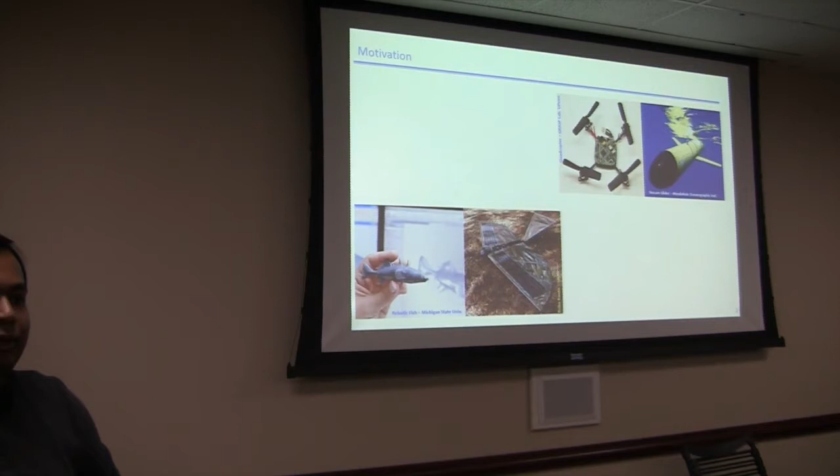So the last couple of decades have witnessed a tremendous advancement in unmanned vehicular technologies. For example, these quadcopters and underwater sea gliders are quite common in application domains, and these vehicles are being applied in many areas, for example surveillance, search and rescue missions, environmental monitoring.

In particular, these sea gliders were deployed in Monterey Bay back in 2004 for a month-long experiment to study underwater ocean corridors. And recently, bio-inspired robotics is gaining importance, and there is a group at Michigan State University who have developed this robotic fish, and currently this robotic fish is being deployed in the Great Lakes to locate and stop fish of interest in that region.

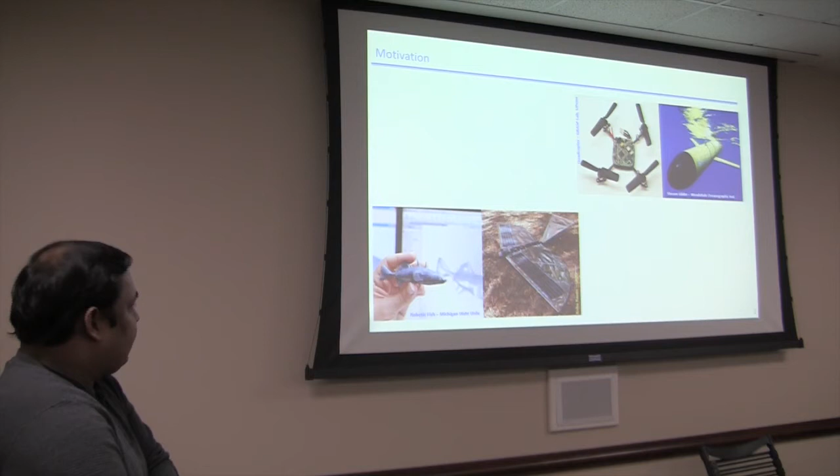And here at ISR, a group of Professor S.K. Gupta is doing research on these bird-inspired robots called Raven, and probably many of you have watched YouTube videos on this Raven, and it's quite amazing.

But the way these vehicles are deployed in the field, for example drone deployment or underwater search missions, involves a human in the loop in terms of piloting these vehicles. And that gives rise to an Achilles heel in the system in terms of the vulnerability of the communication link between the command station and the vehicle. At best, the link can be lost. At worst, the link can be taken over by an adversary.

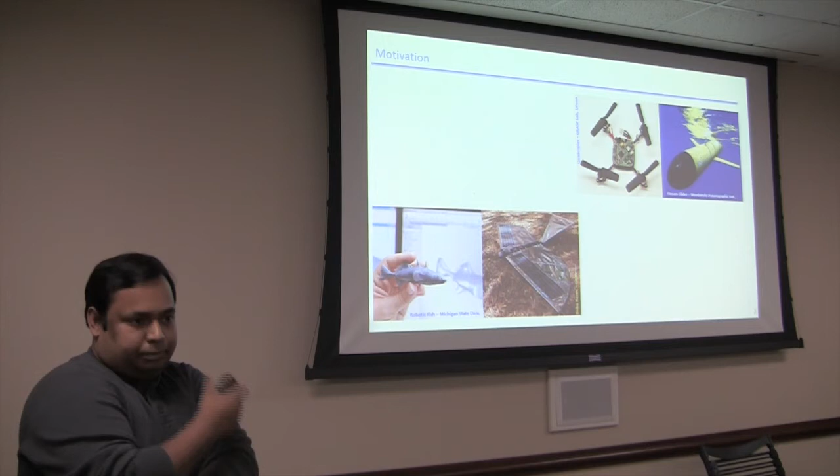So this gives rise to the need to develop complete autonomy for this group of unmanned vehicles. On the other hand, we can notice collective motion in a number of natural settings, for example ant mills or fish schools to bird flocks in the sky. There are many more examples in nature where a large number of agents interact with each other and give rise to some coordinated motion pattern.

So today I'm going to tell a story about how we can use these inspirations from nature and develop algorithms for collective motion in a group of robotic agents. And this is what I'm planning to cover today.

I begin with a brief description about the models that we'll use in the talk, and the main part of the talk will have two sub-components. In the first part, we'll describe our findings from analysis of biological pursuit and collective motion.

Here we'll use custom-made algorithms to extract parameters of motion, namely speed, curvatures, etc., from observed position data, and then we'll analyze those parameters to get an insight about the underlying flight strategies and control laws, because that's our main focus.

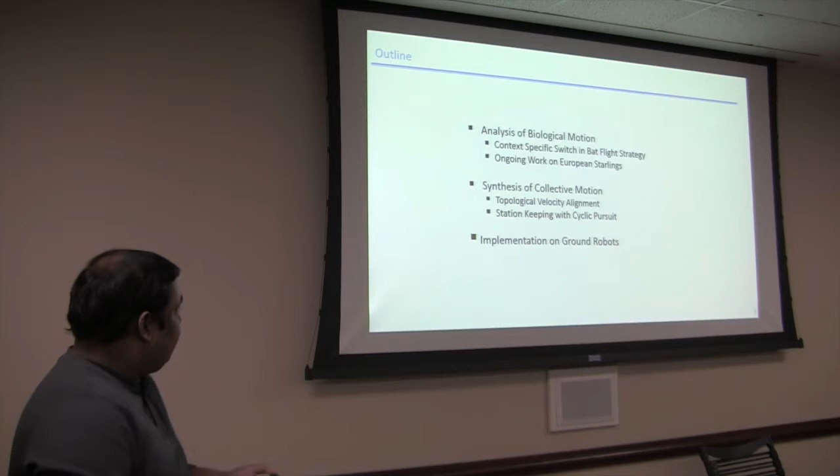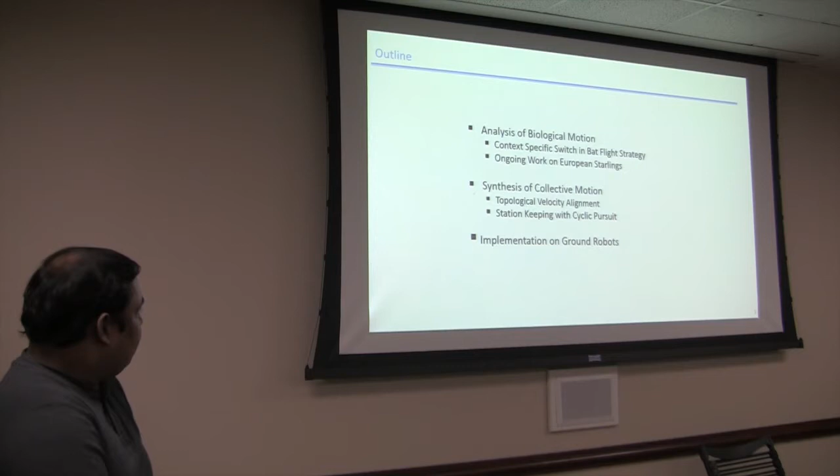Once we have an idea about the underlying flight strategies and control laws, then we can apply those principles to robotic agents. So the second part of the talk will discuss two particular strategies inspired by our findings from this analysis, and show how they can guarantee some desired behavior. And we'll conclude the talk by showing some implementation results.

Okay, so before going into the details of analysis and synthesis of collective motion, we begin by describing a model which we'll use throughout the talk to describe an agent's motion. Here we represent the position of an agent along the trajectory by this vector r. Now, if we assume that the velocity of the agent never goes to 0, then we can easily define a unit tangent vector along the trajectory.

So the first equation here describes the velocity in terms of speed nu and a normalized velocity vector x. Now, once we have a unit vector x, we can pick two more vectors y and z in such a way that x, y, z forms an orthonormal triad, or a reference frame. Now these three equations describe the evolution of that frame along the trajectory.

So these parameters u and v represent the natural curvatures for the system. These natural curvatures are very well related to classical curvature, or the inverse of turning radius. So if you take the square root of the sum of squares of u and v, you will get the classical curvature.

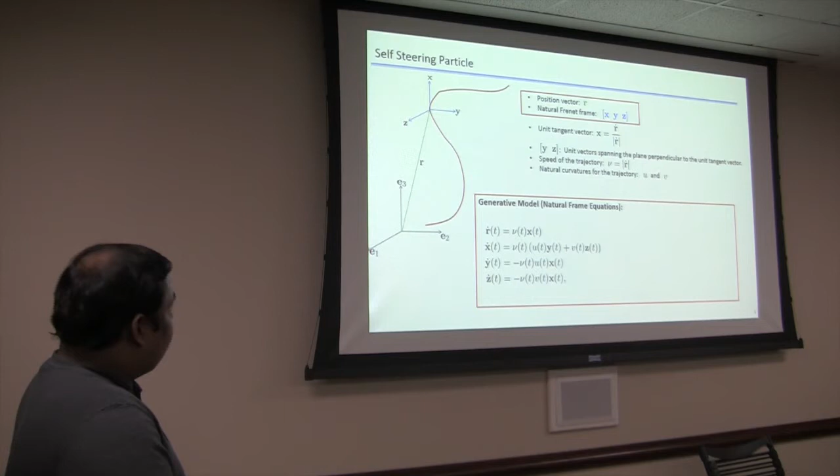So first we'll talk about our findings from the analysis of bat pursuit events.

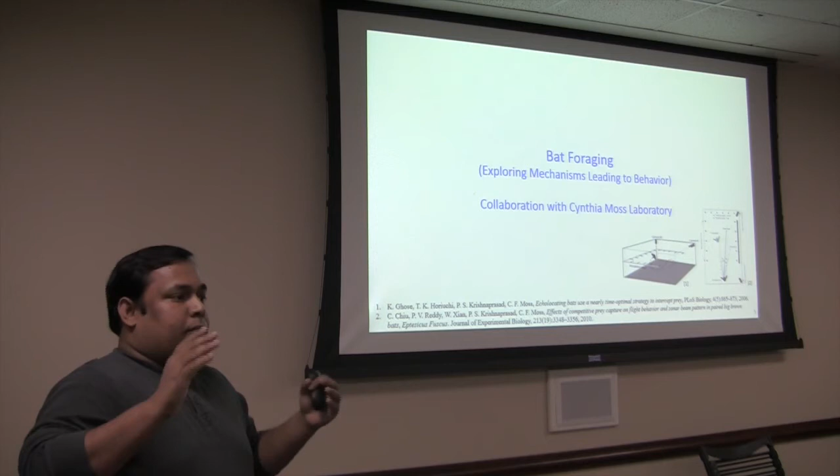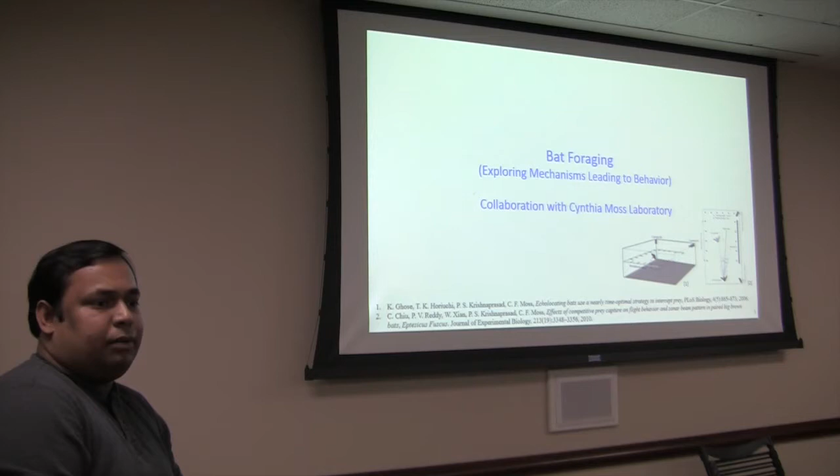The echolocating behavior of bats, the property that they use sonar waves to detect and localize targets or their environment, was first studied back around 1917. The study was inspired by the need arising during the First World War, because people were looking for proper ways to use sonar waves for detecting submarines, and that was the starting point for studying bat echolocation.

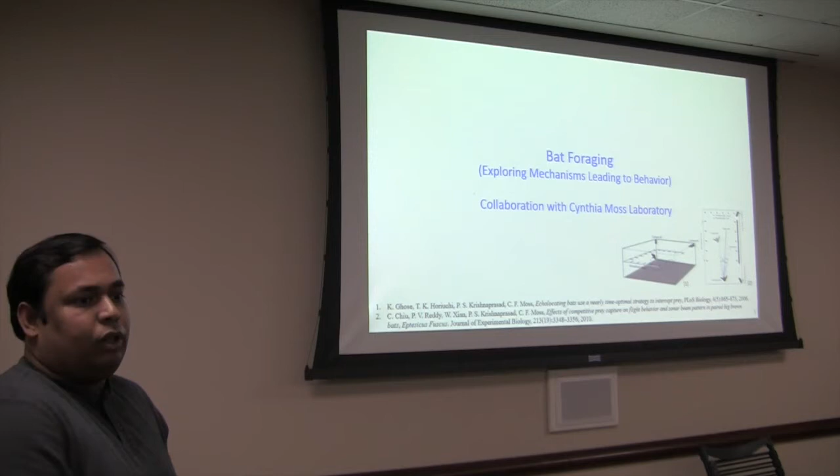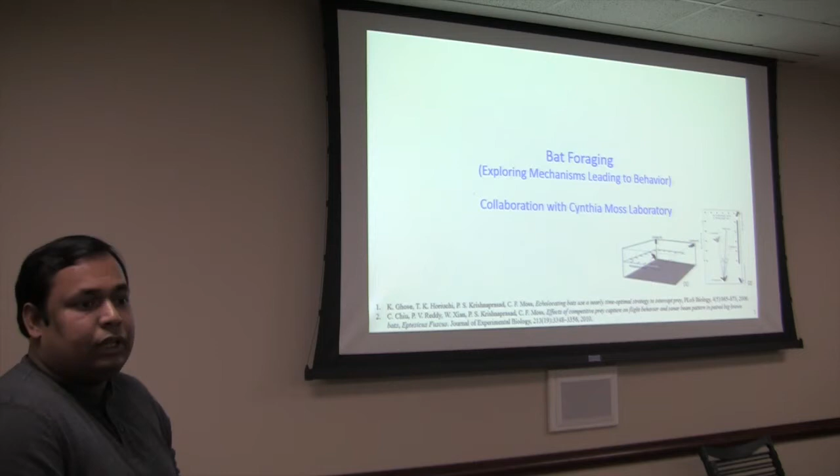People have been studying the echolocating behavior of bats for a long time, but until recently, very little research was done in understanding the pursuit strategies and feedback mechanism in bat echolocation. One of the major stumbling blocks in that direction was the unavailability of a proper high-speed motion capture system.

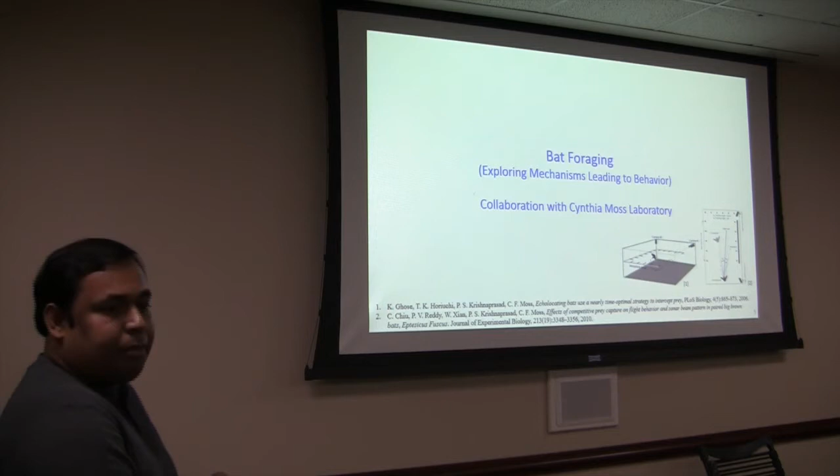Fairly recently, Ghose and Prof. Moss studied echolocating bat behavior and showed that when a particular bat tries to pursue a moving target, they use constant absolute target direction, a particular type of strategy, to chase the target.

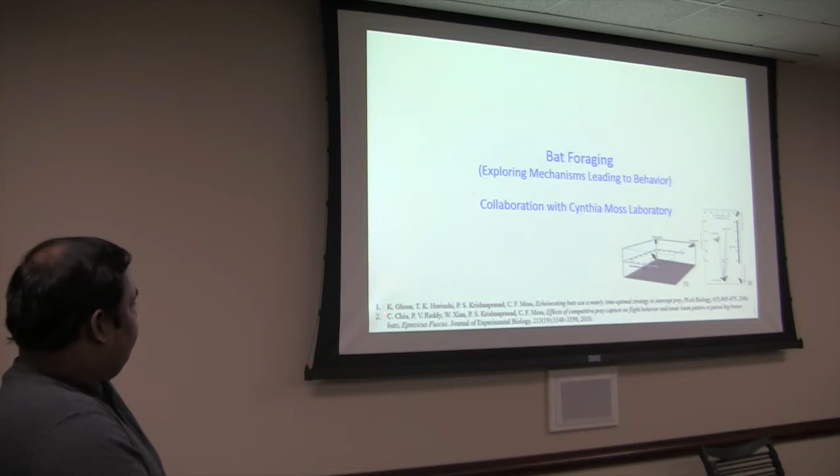But in a later study by Chen Chiu, they showed that when the setting is changed from a single bat and single target to two bats competing for the same target, they switch the strategy. But in both studies, they used some qualitative measure to do the analysis.

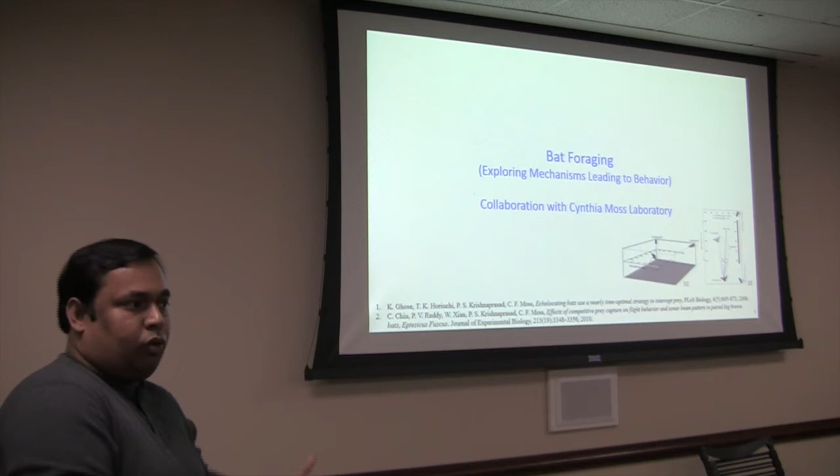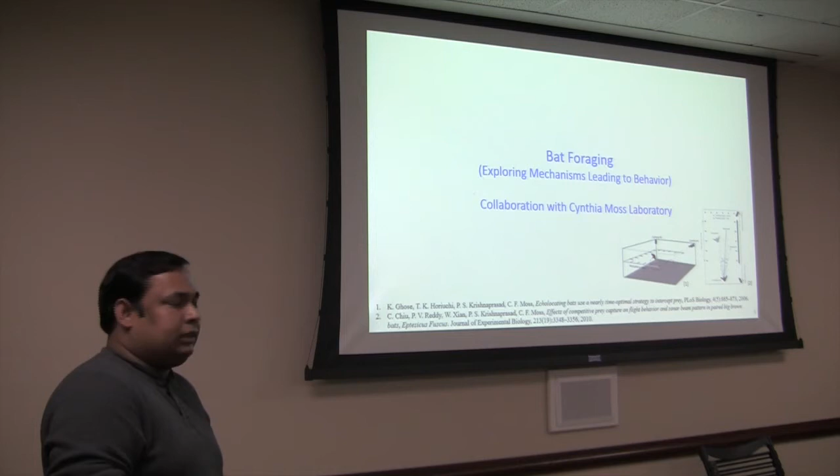So in this present work, what we have done is perform a comparative analysis of the flight strategies in these two contexts and have shown quantitatively that there is a switch in the underlying flight strategy. Our analysis also reveals some estimate of the behavioral latency involved in this pursuit behavior.

Before going into the details of this analysis, I'll introduce the candidate flight strategies that we'll be considering for our purpose. Classical pursuit is one of the oldest forms of pursuit strategies which has been studied.

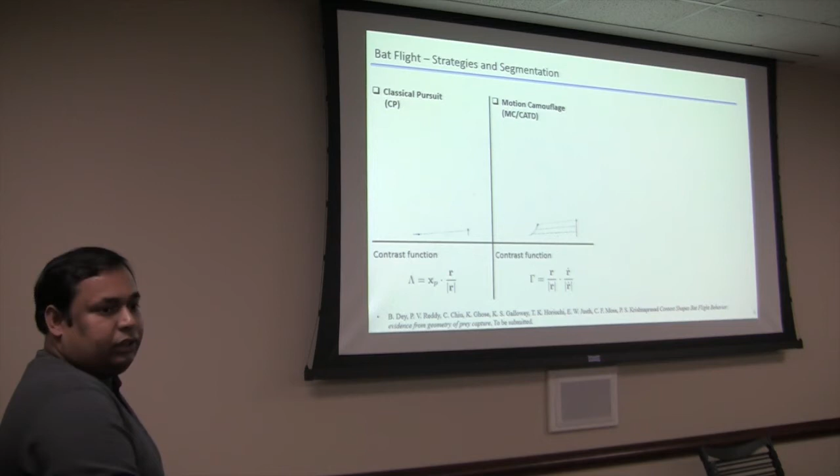Now we introduce the contrast function to measure these strategies in a quantitative way. Here R represents the relative position of the pursuer with respect to the evader. The contrast function lambda is used to measure classical pursuit, and if lambda is -1, that implies classical pursuit has been achieved. So what is lambda? It's basically the direction cosine between the pursuer's velocity and the relative position of the pursuer with respect to the evader.

Lambda equals -1 implies that the velocity and the baseline should be aligned. On the other hand, motion camouflage is quantified by the contrast function gamma. Here, R dot is basically the relative velocity of the pursuer with respect to the evader. When gamma equals -1, we can say that motion camouflage, or CATD, has been achieved.

Now we introduce two particular properties which will be instrumental in understanding an individual's role in a dyadic interaction. We introduce two notions, namely following and converging. A flight segment is following if the pursuer's velocity is directing towards the evader, meaning the pursuer's velocity has a negative projection on the baseline vector.

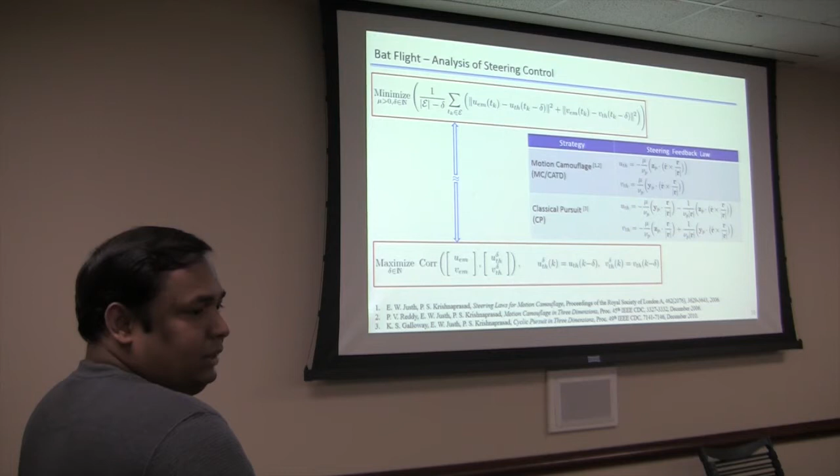And in this case, as we are dealing with biological elements, it's reasonable to expect some behavioral latency, and that's why I have incorporated delay into this cost mismatch minimization problem. It can easily be shown that this mismatch minimization problem can be approximated by a correlation maximization problem, which reduces the computational complexity by a great extent.

So now here we are looking at the comparison between empirically observed curvature values and the curvature values predicted by the theoretical feedback laws. The second row shows the correlation plots, where I'm plotting correlation as a function of delay. We can see that in this case we are getting strong evidence in favor of classical pursuit, and the behavioral latency is around 170 milliseconds, which is comparable to the behavioral or sensory-motor delays observed in mammals.

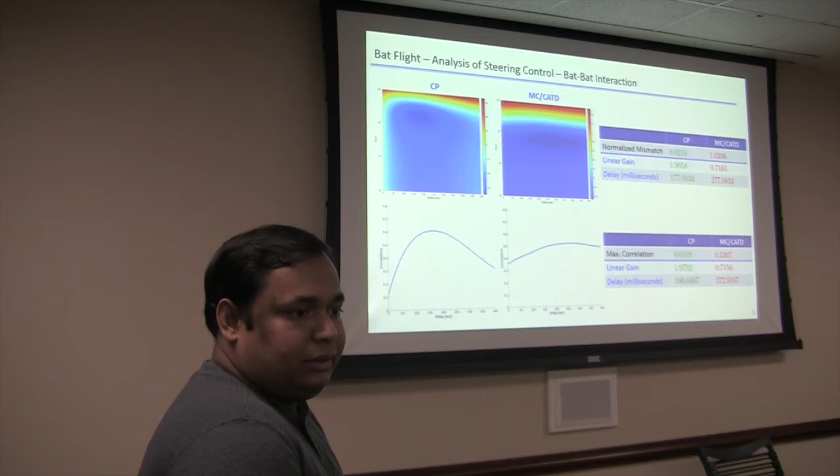Now, if we go to bat-insect interaction, we can see that here we have very strong evidence in favor of MC or CATD, and the behavioral latency is around the order of 120 milliseconds. We can easily see that the strength of demarcation is much more evident in the context of bat-insect interaction than that observed in bat-bat interaction.

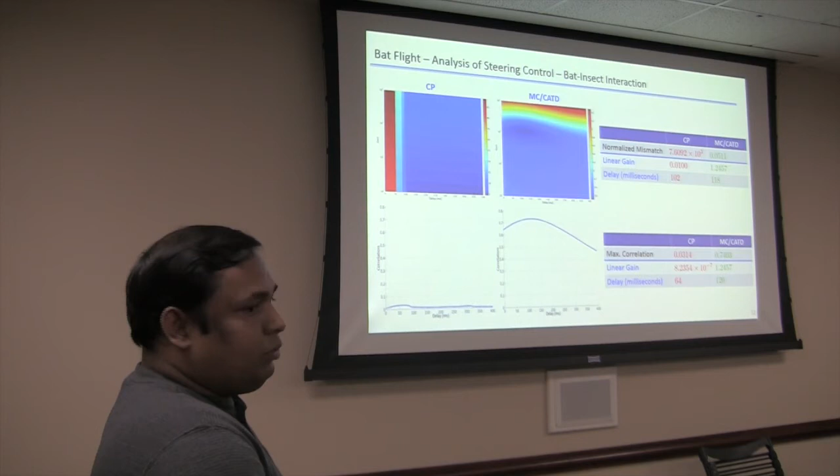So now we can say that to get an idea about the underlying feedback mechanism or the interaction between the agents, we need to look at the levels of both flight behavior and the feedback mechanism. If we look only at one level, the conclusion might not be proper - that's a very important point in this analysis. Through this analysis we have shown that there is a context-dependent switch in flight strategy in bat foraging.

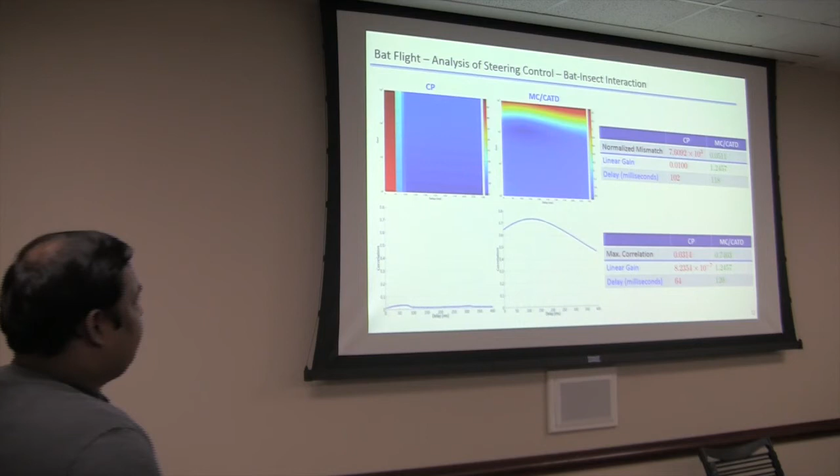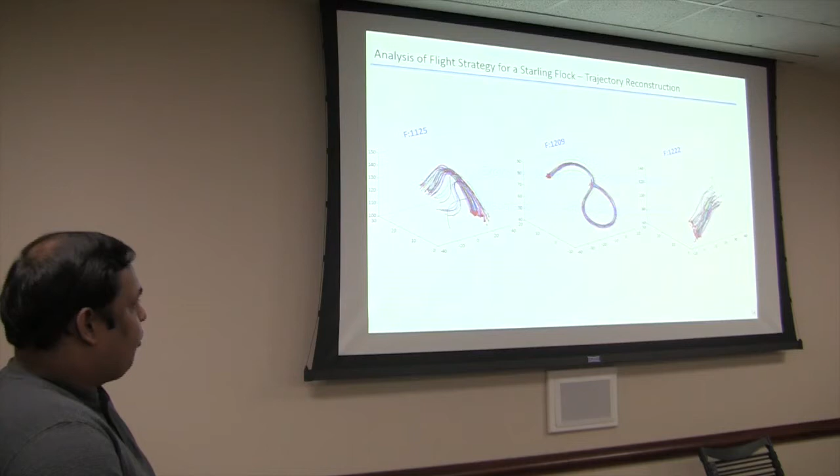So now we'll go into the second part of the talk. We'll shift gear and move to collective motion in its true sense, because so far we are considering pursuit behavior, which involves two agents. Here we'll show some results from our ongoing work with Starling data. We are collaborating with Andrea Cavagna from University of Rome, and they have collected data near a city center at Rome. Here we are going to analyze three particular flight events.

So these flight data were collected from a rooftop using multiple camera networks, and they used stereo reconstruction to extract individual trajectories from a set of two-dimensional images. Here we have three particular events: the first involves a single turn, the second involves two consecutive turns in opposite directions, and the last is a minimally maneuvering flock.

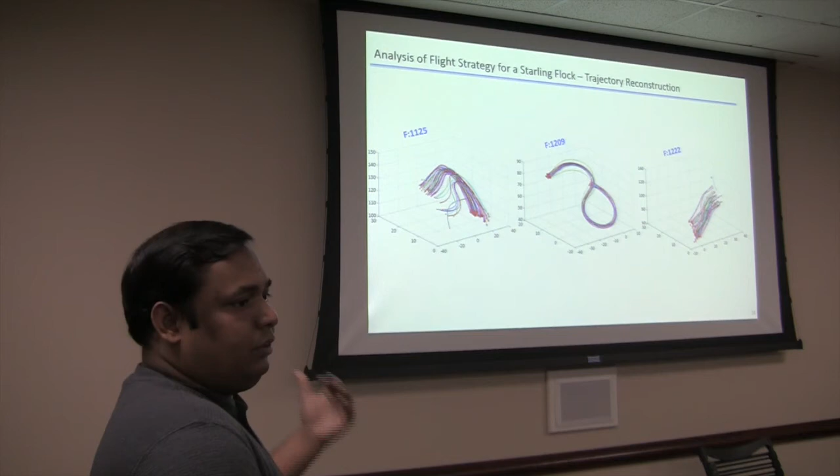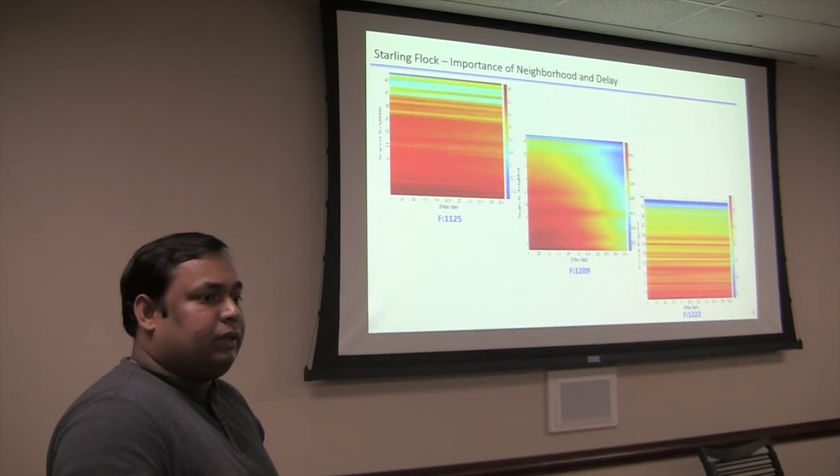We used algorithms to extract speed and curvature for individual trajectories. When looking at the correlation between an individual's curvature and the curvature of its neighbor as a function of delay, we notice that this correlation depends both on the number of nearest neighbors and the delay. That gives an idea of what to look for—it implies we need to examine the effect of both neighborhood size and behavioral latency, which is expected since we're dealing with biological elements.

This result actually aligns with another finding where they used more complicated analysis to show the importance of 5 to 7 nearest neighbors. Currently we are looking into what could be a possible underlying steering control law for this kind of behavior. In what follows, we'll show that a particular steering control law, which we gained insight about from this study, can guarantee convergence to a particular behavior. This is very much ongoing work.

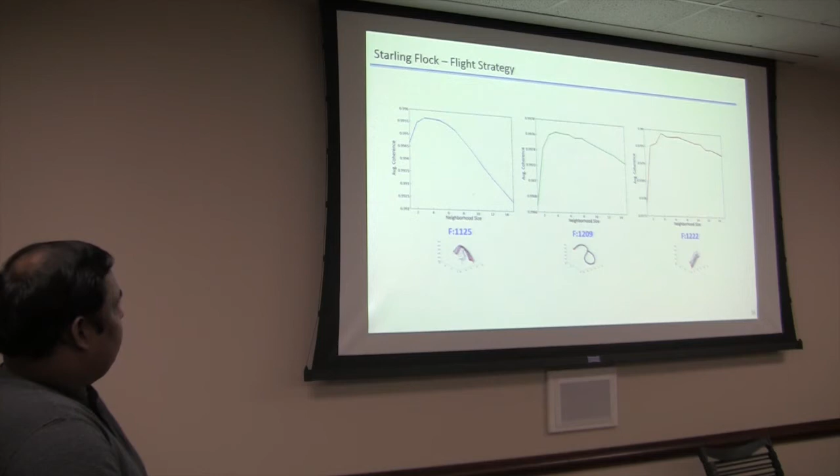Now I'll go into the synthesis part. Here I'll discuss a particular flight strategy named topological velocity alignment, which has been inspired by our findings from the Starling data analysis.

In topological velocity alignment, we consider an individual agent i from a group of n agents along with its neighborhood Ni. Given an agent i and its neighborhood Ni, we can define the neighborhood center of mass velocity this way. If this velocity is not equal to zero, we can define the unit tangent vector along that velocity, denoted by x_Ni. In topological velocity alignment, agents try to move such that the direction cosine between an agent's velocity xi and x_Ni, the direction of the neighborhood center of mass velocity, is 1—they are trying to move in the same direction. Quantitatively, we use this contrast function to characterize this velocity alignment strategy.

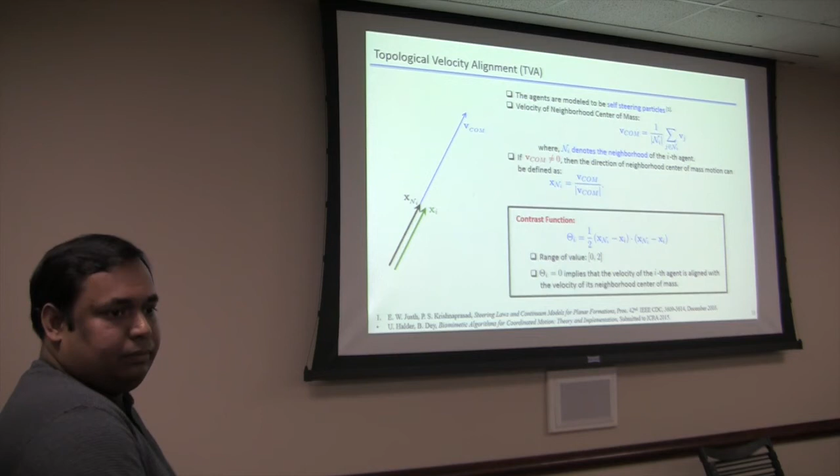We can notice that these contrast function values can vary from 0 to 2. In this case, a contrast function value theta_i equal to 0 implies that the velocity of the ith agent is aligned with the velocity of its neighborhood center of mass. I forgot to mention that here we are using the self-steering particles model, introduced earlier, as the model for the evolution of trajectories.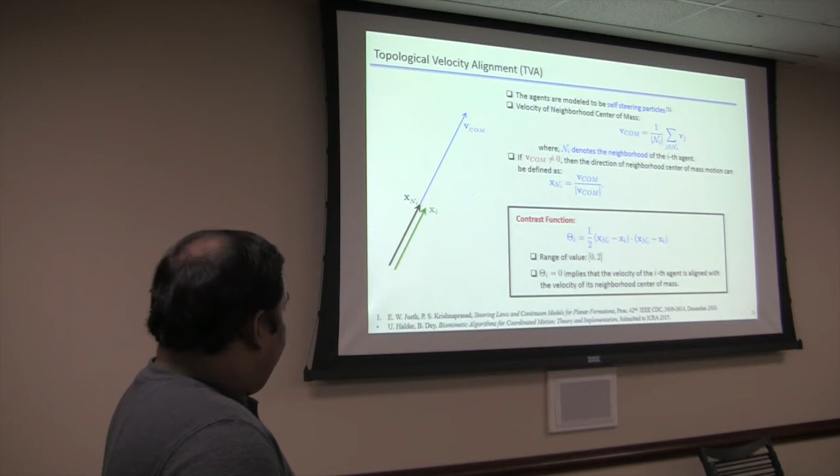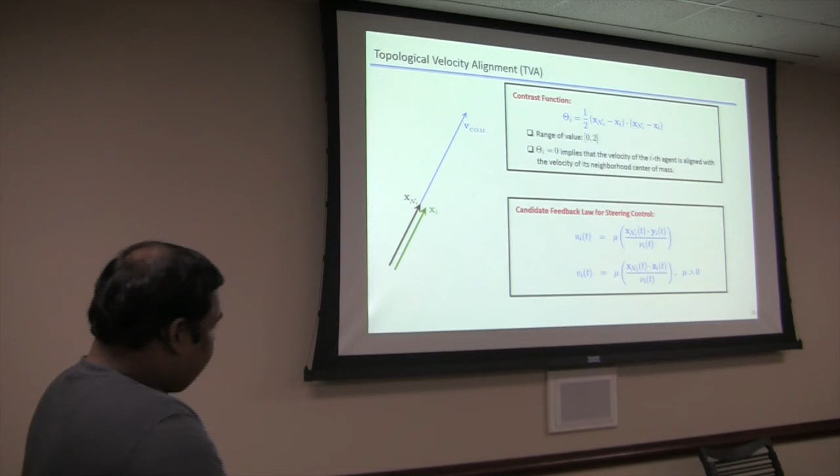Now we can construct this particular feedback law. Basically, these are the natural curvatures of the ith agent, governed by the measurement of the neighborhood center of mass velocity. We'll show that using these particular steering control laws, we can make the agents move parallel to their neighborhood center of mass velocity.

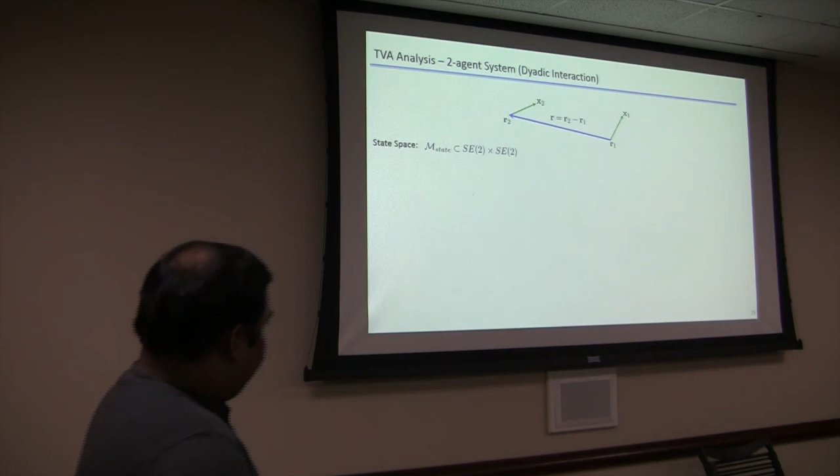Here we are considering a planar system along with the velocity vectors x1 and x2. The two agents' positions are denoted by the vectors r1 and r2. The corresponding state space of the system can be thought of as two copies of the Euclidean group of planar motion—basically, corresponding to each agent, we need to track its position and orientation. The position and orientation of an agent in a plane can be represented as an element of this special Euclidean group of planar motion, and since we have two agents, we need two copies of that space to represent the state of the system.

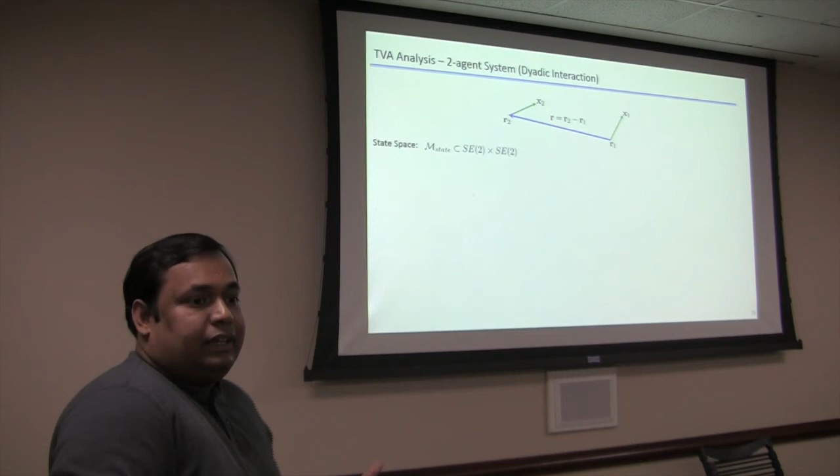As we are interested in relative position and orientation of the agents, we can consider the space of shape variables, which can be characterized by three parameters. Because the relative position has two components, and the relative orientation can be represented by one angle. So alternatively, we can use two angle quantities, namely psi and phi, and then distance rho as three scalar shape variables.

We can show that the dynamics of these scalar shape variables can be represented in this form. In this case, we have used the feedback laws, specifically this particular feedback law restricted to a planar setting.

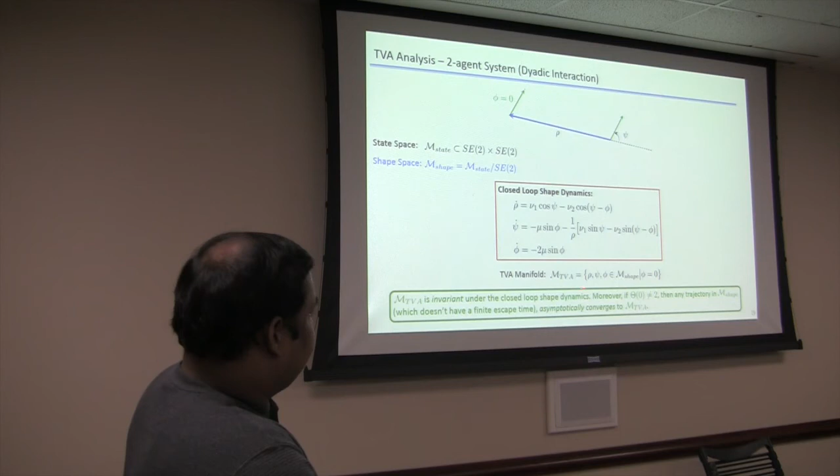Now we can show that the dynamics of phi is self-contained and stable. What is phi? Phi is just the mismatch in alignment. We can easily show that under this dynamics, the mismatch goes to zero. So if I define a subspace of this shape space as the set of configurations where phi equals zero, that particular subspace is closed under these dynamics. Moreover, it's attractive—wherever you start in this space, it will be driven to this subspace.

Do you have any question, Deepak?

So there is a proof for asymptotic convergence.

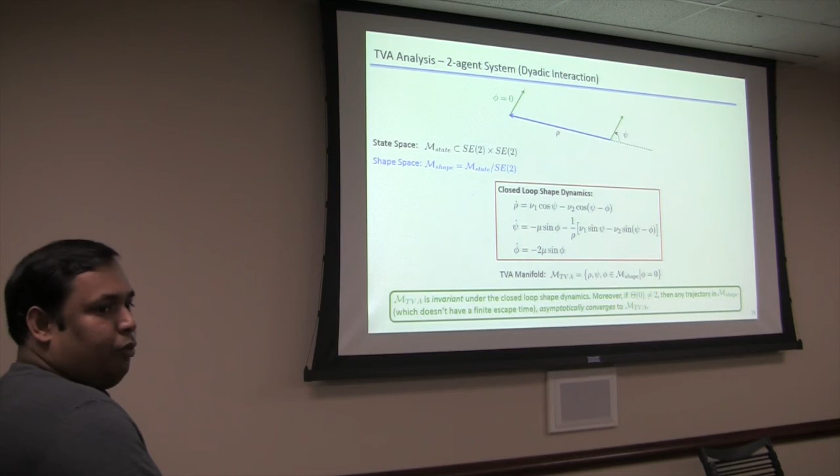Finally, I'll show some results which came out of this collaboration with Kevin Galloway, faculty at the Naval Academy in Annapolis. He has studied cyclic pursuit, a setting where there are n agents and agent i pursues agent i plus 1—basically a cyclic interaction among the agents. In that setting, you can use classical pursuit, motion camouflage, or other strategies as a building block, or even TVA can be used as a building block.

Here we are considering constant bearing pursuit, a generalized version of classical pursuit, as a building block. Previously he showed that under that kind of interaction with constant bearing pursuit as a building block, some interesting behavior emerges, namely rectilinear equilibrium or circling equilibrium. But where the circling equilibrium emerges and the radius of the circling equilibrium are determined by the initial position and orientation of the agents, so it was not very effective from a design perspective.

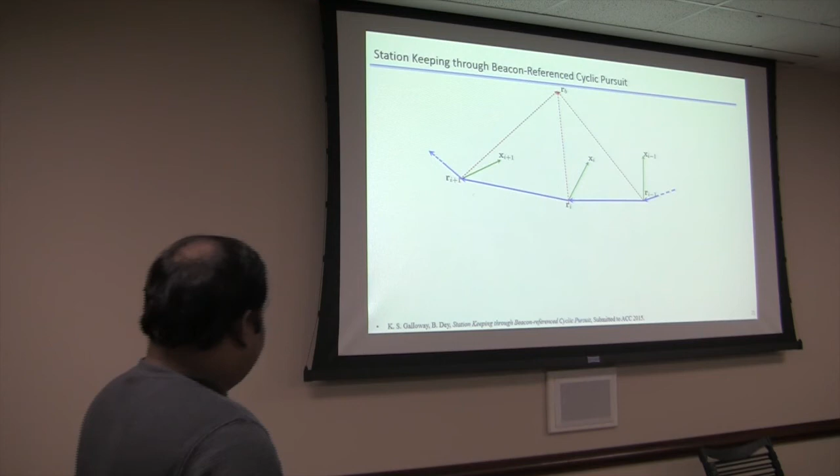So here we have introduced a beacon in a network of cyclically interacting n agents and shown that some interesting behavior emerges. We are considering n agents where each agent's position, namely agent i's position, is denoted by the symbol Ri, its velocity by Xi, and Rb represents the position of the beacon. All these agents move in a planar setting, so there is only one control, namely U, which can be expressed in terms of this feedback law.

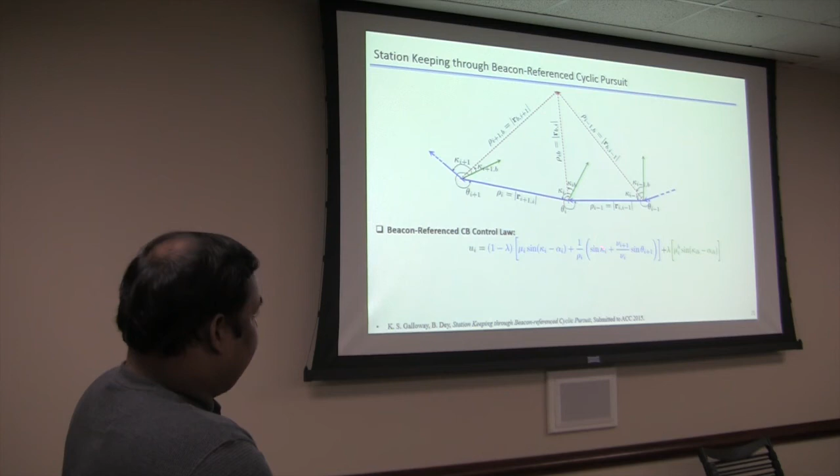Another feature of this control law is that it doesn't require any explicit measurement of distance. Although it seems that the feedback law involves rho I, the distance between an agent and its neighbor I plus 1, the whole term can be thought of as an optic flow element, and with proper sensors, you can measure this quantity without knowing the distance explicitly.

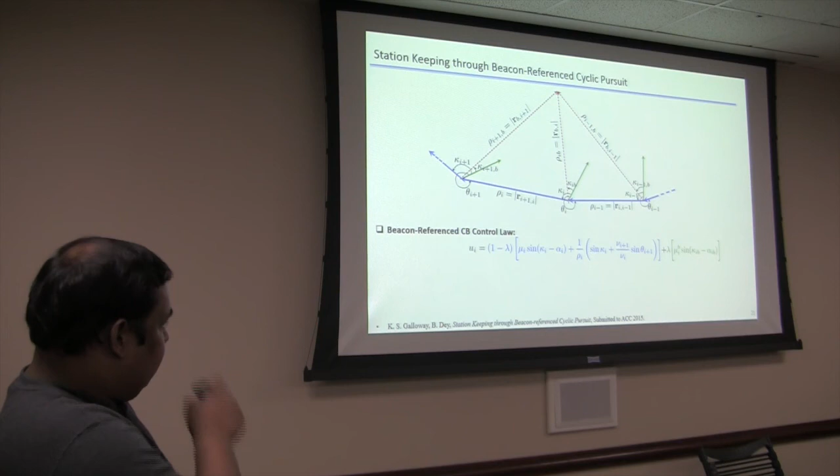So now I will conclude this talk by showing some implementation results. Here in our lab, we have developed a test bed where we can implement these control strategies in a group of mobile robots or field robots.

So we have a couple of these Pioneer 3 robots, which are differential drive robots. Differential drive means that each wheel can rotate independently, and that allows us to have zero turning radius for these robots.

And we have this motion capture system which can sense the position of these robots. Then we use a computer running Robot Operating System, or ROS, to compute the feedback control laws. We close the loop using a dedicated Ethernet communication between the motion capture system and the control computer, and Wi-Fi from the control computer to the robot.

So now you can ask, so far I was talking about decentralized control, or control without any need for a communication link between a common station and the vehicles. But here, to design robots which have all the computing and sensing capabilities on board is another volume altogether. So here we are just offshoring the measurement, control and computing requirements to a separate motion capture system and a separate computer. But we have to keep in mind that the control laws are truly decentralized in nature.

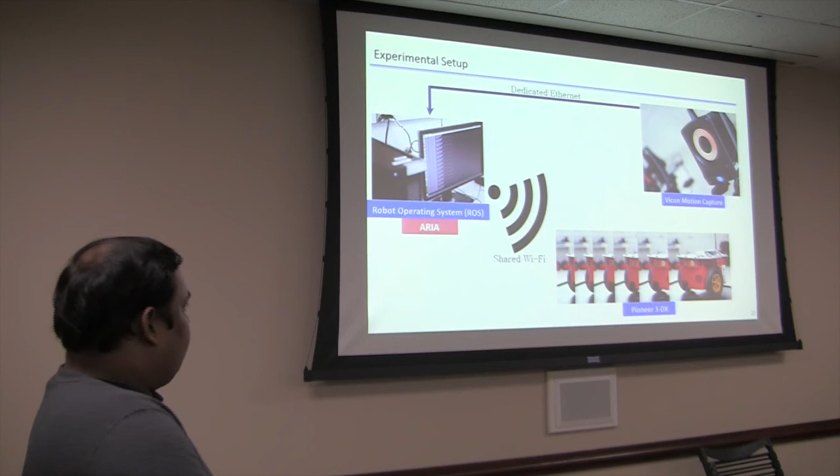So now I will show some implementation video. Here we have implemented the topological velocity alignment on a group of mobile robots. This particular video clip has 3 small sub-videos.

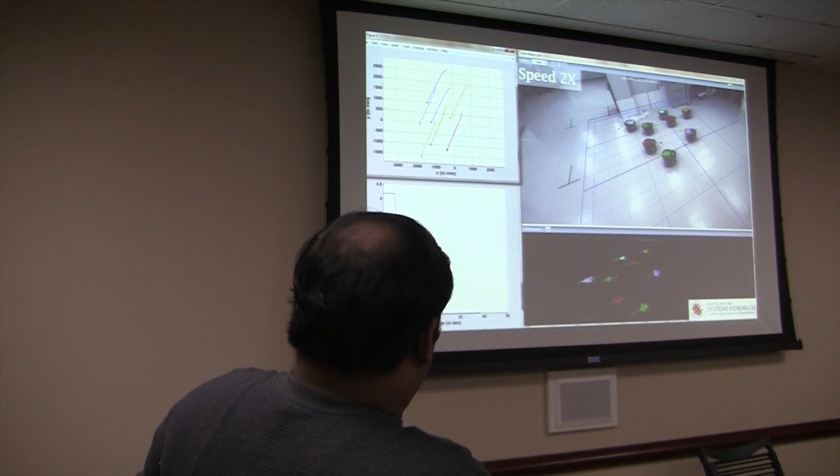The first video shows that by using this strategy, and by making each individual interact with 3 of its nearest neighbors, we can make the robots move in a single direction. We can notice that although they started initially going in different directions, after some time they go in the same direction. Here is the plot of the cost function theta, and it goes to 0 quite fast.

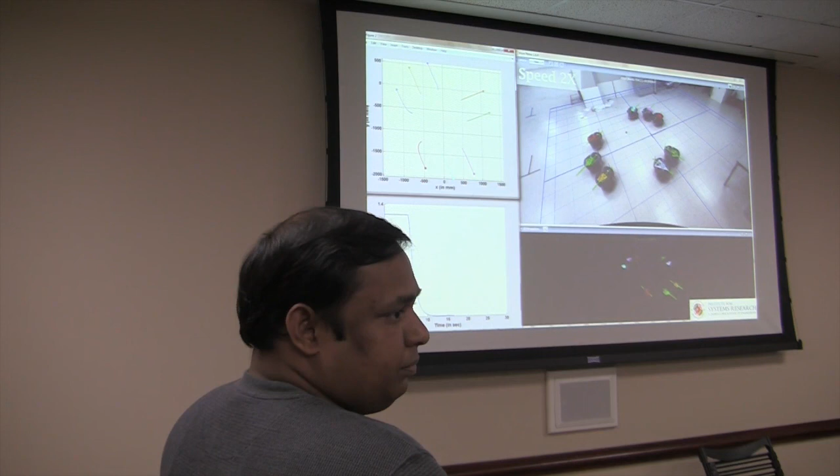Now we show that if I reduce the number of neighbors, or if there's a reduction in the neighborhood size, that can give rise to a split in the flock. This is quite interesting because normally, in the context of starling flocks, you can notice that in the presence of a predatory threat, the group of starlings splits into smaller subgroups. Here we're trying to emulate that kind of behavior.

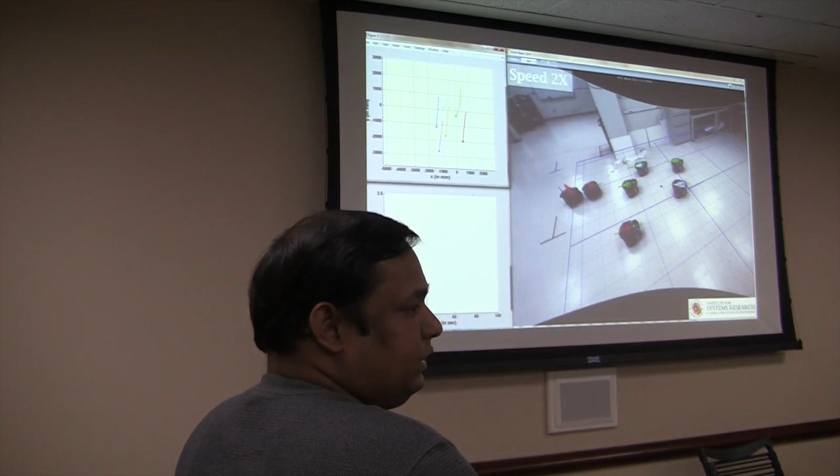So we have a group of 6 robots, and at this moment they are interacting with one of its nearest neighbors. You can see that as there is a disturbance trying to make one robot go in another direction, finally there are 2 groups of robots. Basically, one of the robots encounters an obstacle, and that forces it to move in another direction. And as the neighborhood size is small, it gives rise to 2 subgroups in the flock.

Now I will show another video where we have implemented the cyclic pursuit. Here we are using our cyclic beacon-referenced cyclic pursuit control for 5 agents, and we can see that eventually they all end up doing a cyclic pattern around this beacon.

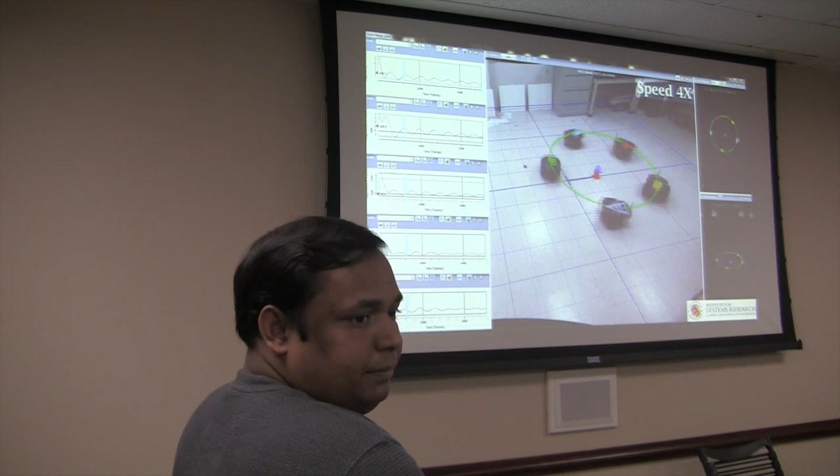By choosing the design parameters properly, for a given radius we can easily choose the parameters such that they will circle that particular radius.

So now we will just move the beacon from one position to another, and we'll show that the whole group moves from one position in the lab to another position, and the new radius is quite stable. So they will be circling the same radius.

We can notice small oscillations in the distance from the beacon to the robots, and that can be attributed to the fact that in our modeling we always considered the agents to be point particles, but in reality the robots have some physical dimension which is not negligible. They have a width of around 300 millimeters, and the magnitude of this oscillation is around 100 millimeters, so that's much less than the physical dimension of the robot.

If we look at the behavior observed compared to the theoretical predictions, we can see that there is a small error at steady state, but this error is much less than the physical dimension of the robot. This error can be attributed to the fact that in our model we considered the agents to be point particles, but in reality they have some dimension.

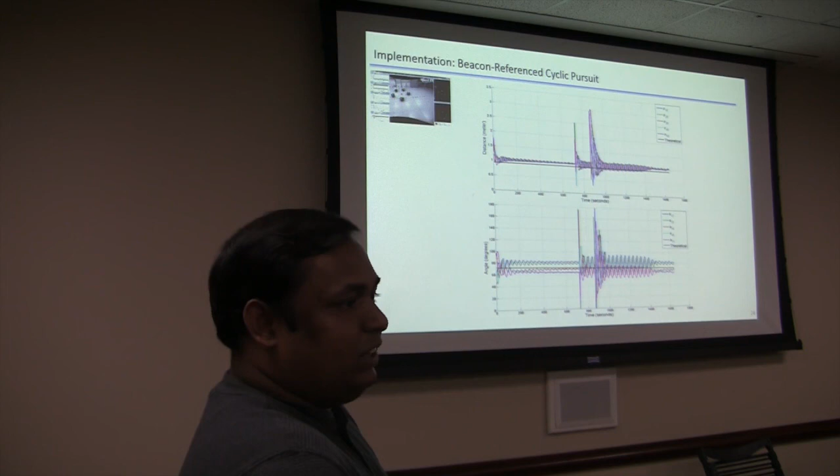We also noticed another factor behind these oscillations: we always assume the lab floor to be perfectly horizontal at the same level, but there's a small slope in the lab floor. As we are looking at the XY component of the position, that gives rise to some oscillation. Basically, if we draw a circle on a plane, and look at it not vertically but at a slight angle, it will look like an ellipse. So something similar is happening here.

So that was all what I wanted to tell today, and thanks for your attention.